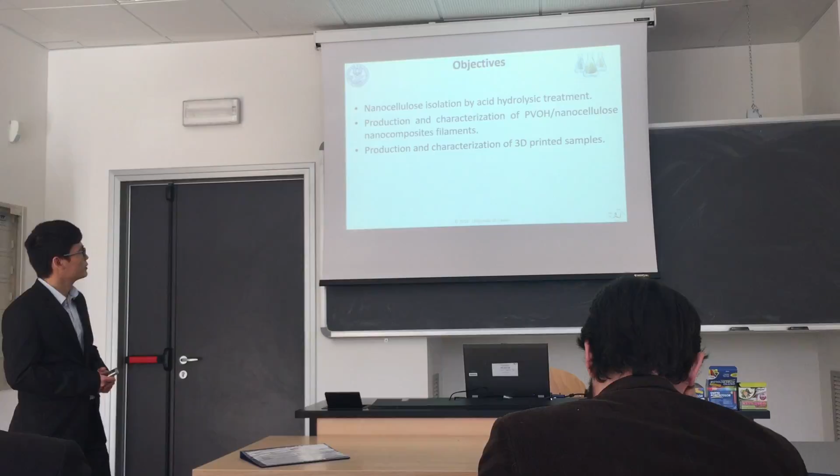My thesis will focus on three main parts. The first part related to the production and isolation of nanocellulose by acid hydrolysis treatment. The second part is the production and characterization of the PVOH/nanocellulose nanocomposite filament. And the final part related to the production and characterization of the 3D printed sample.

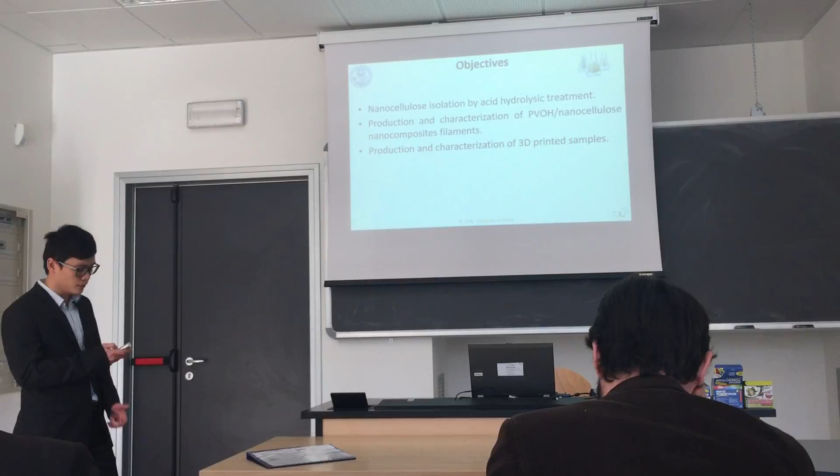Let's move to the second part, the experiment part.

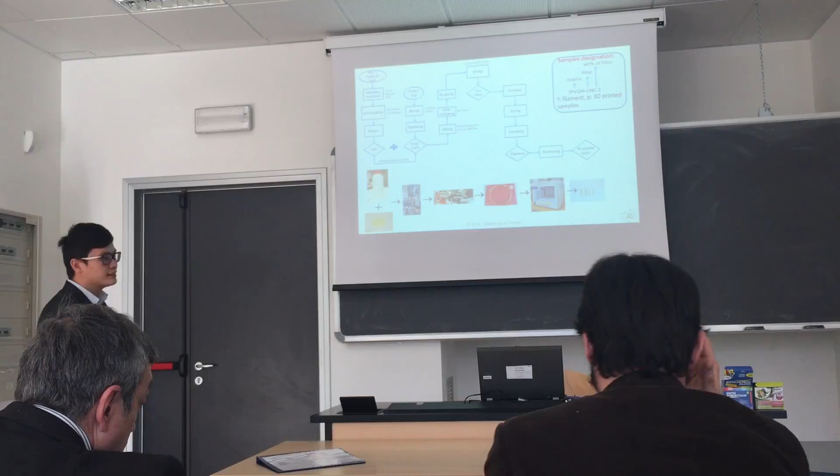Here is my nanocomposite production. From the left side is the production of nanocellulose. Nanocellulose CNC was synthesized by acid hydrolysis treatment for 1 or 2 hours. The synthesized CNCs were then mixed with the PVOH matrix with the help of ultrasonication. The mixture was then degassed and dried in the oven for a few days to obtain the film plates.

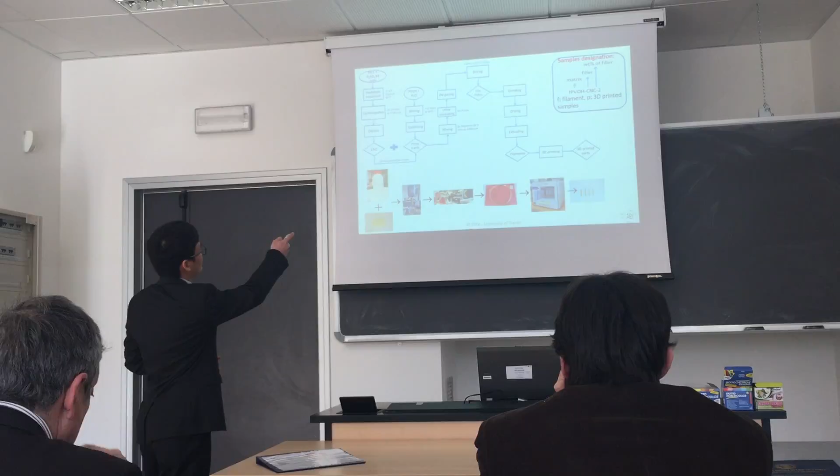Afterwards, the film plates were ground into powders before being extruded into filaments. Finally, the obtained filament can be applied in the 3D printing machine to obtain the 3D printed part.

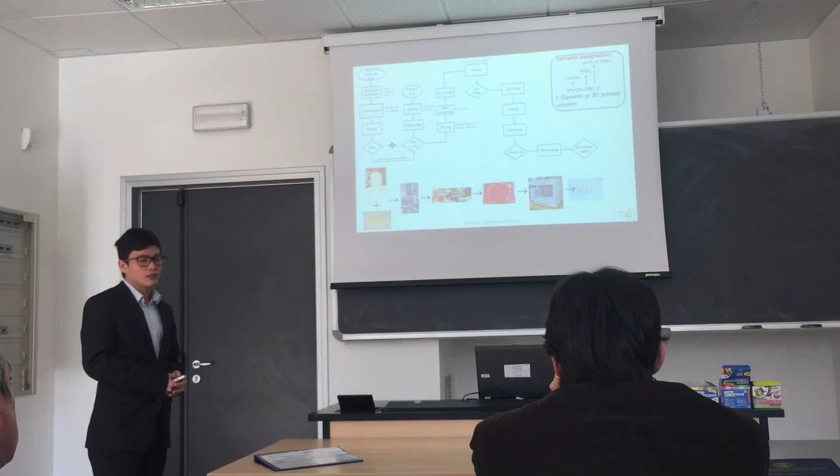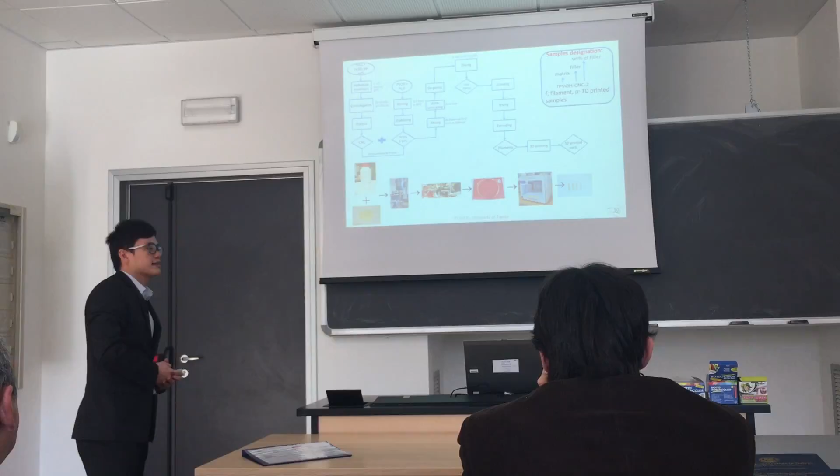To make it easy to understand during my presentation, this is the designation I use for my samples, on the top right. F is designated for filament, P is designated for 3D printed sample, and the value, for example 2, is designated for the percentage of nanofiller used in my nanocomposites.

Let's move to the result discussion part. First of all, I will give you some results about the morphologies and characterization of the synthesized CNC.

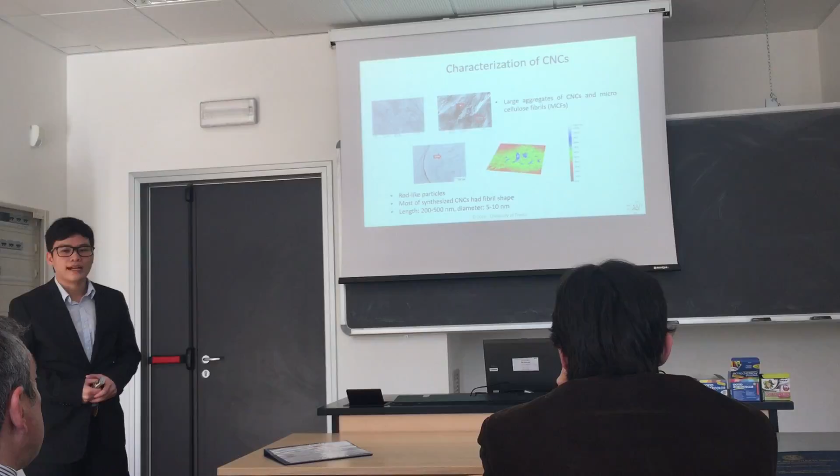The SEM and TEM techniques were used to evaluate the morphologies of CNC. As can be seen from the SEM image with different magnification, we can clearly observe the large aggregate of the nanocellulose and microcellulose fibrils.

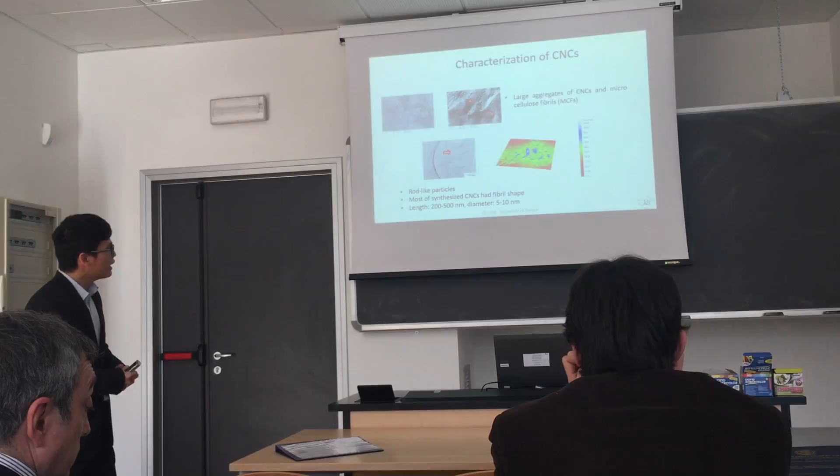Additionally, the TEM image revealed the synthesized CNC with a rod-like shape. Furthermore, the AFM technique also helped us evaluate the synthesized CNC, which has a fibrous shape with length varying between 200 to 500 nanometers and diameter varying between 5 to 10 nanometers.

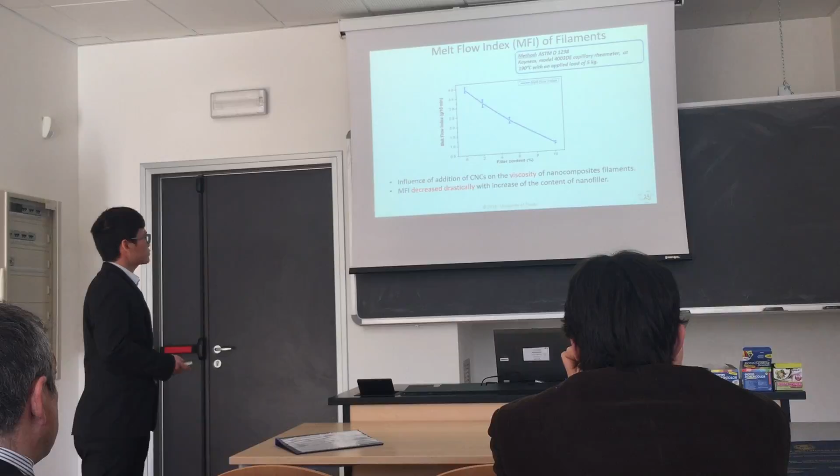Let's move to the melt flow index test, MFI, of the filaments. This test helps us assess the influence of the nanofillers on the viscosity of the nanocomposite filaments. We can see clearly from the graph that the melt flow index decreased significantly with increase in content of the nanofillers.

In these figures, I cannot obtain the value of the composition with 20% of nanofillers because this composition is too viscous. This is one of the reasons I cannot use this composition for the 3D printing application.

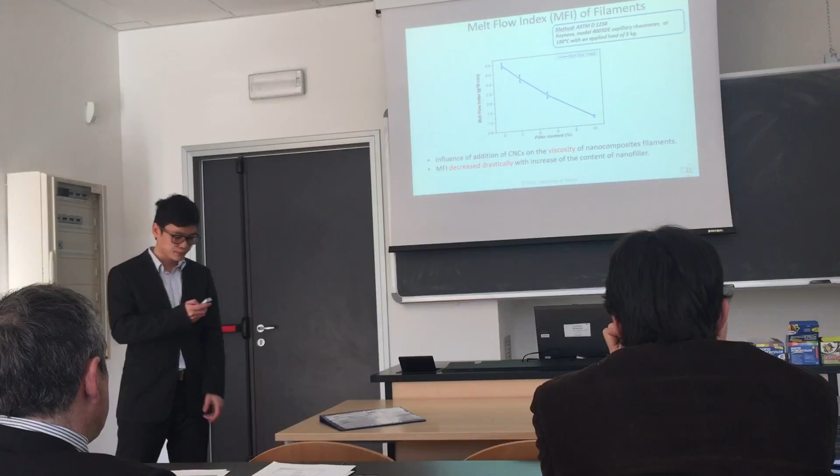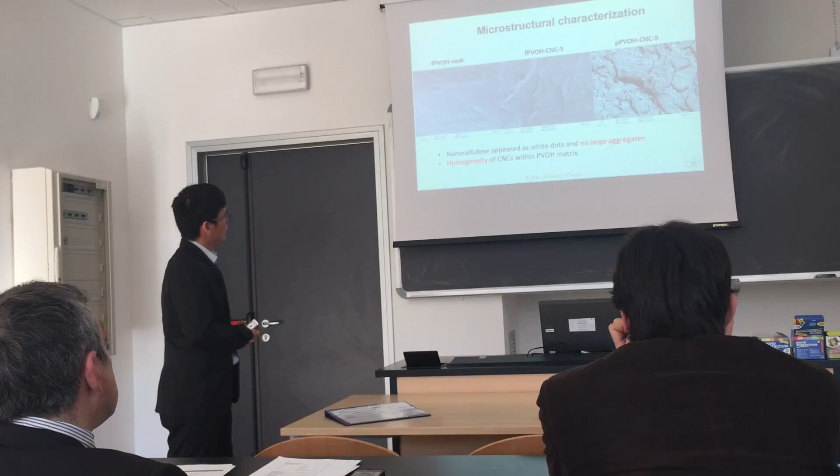We can clearly see that in the pure neat filament, the surface is very smooth, whereas the surface in the composite is a little bit rough due to the presence of nanocellulose. Nanocellulose appears as a white dot, and there were no large aggregates. This observation revealed the homogeneity of the nanocellulose within the PVOH matrix.

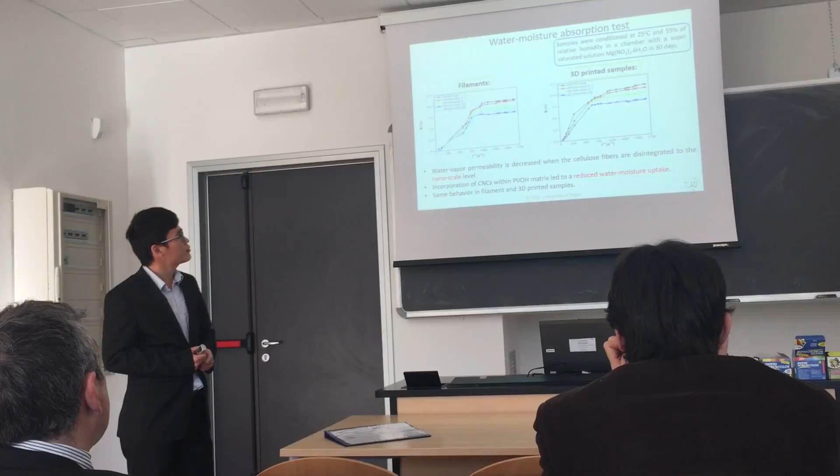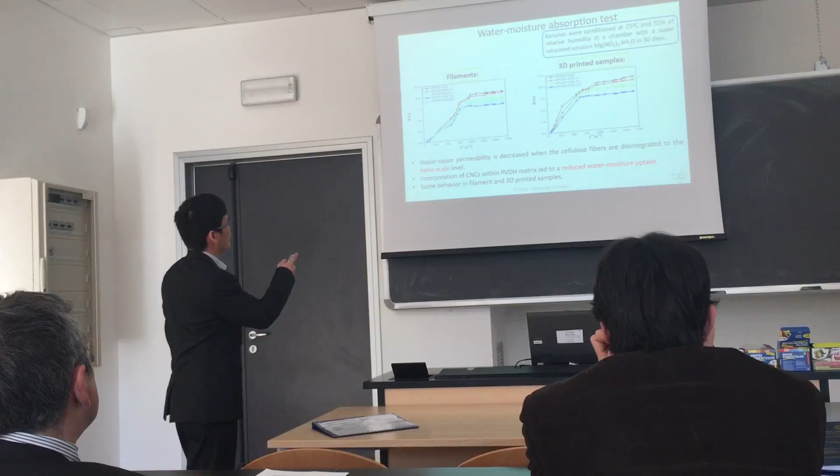Coming to this slide with the water moisture absorption test. This test helps us determine the time to reach the saturation condition. As we can see from the figure, when we increase the content of nanocellulose within the PVOH matrix, the water vapor permeability decreases.

It's very interesting because cellulose is hydrophilic, however when we disintegrate them down to the nanoscale, they behave as a water vapor resistant agent. So this result proves the excellent water vapor resistance of nanocellulose even in a hydrophilic matrix like PVOH.

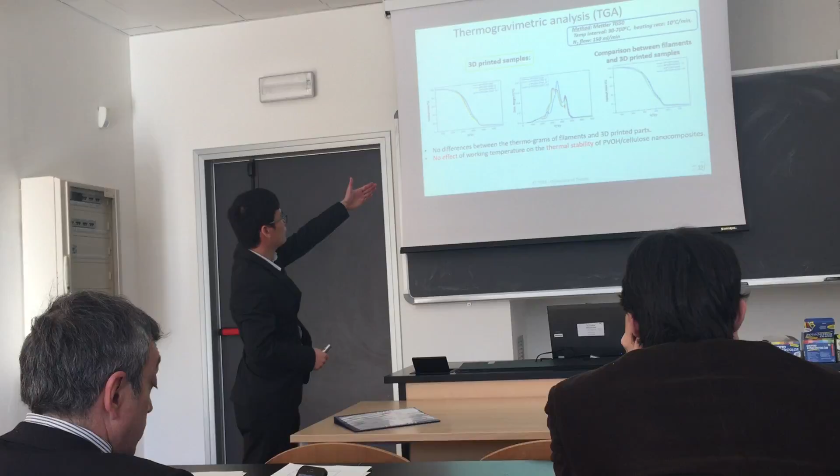This is also the TGA thermogram of the 3D printed sample. We can also clearly see the increase of the thermal behavior by the increase of the maximum degradation temperatures, as seen from the derivative weight thermogram.

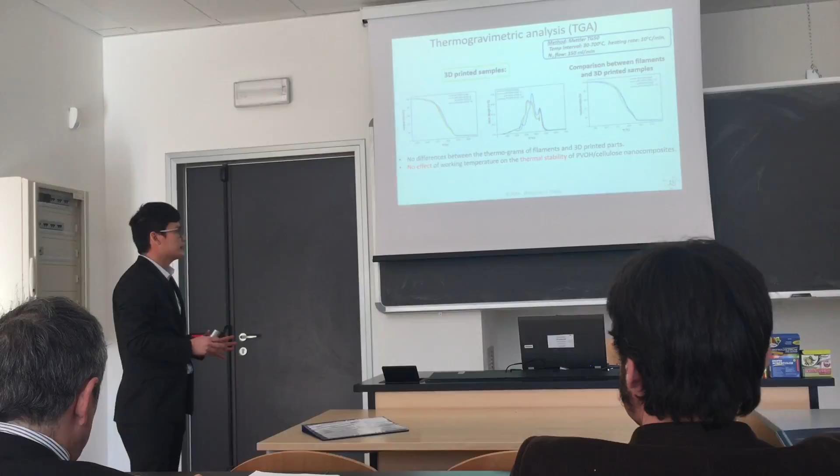Taking into account the comparison between the filament and the 3D printed samples, on the right side there were no differences between them, so we can conclude that there were no effects of the working temperature on the thermal stability of the nanocomposites.

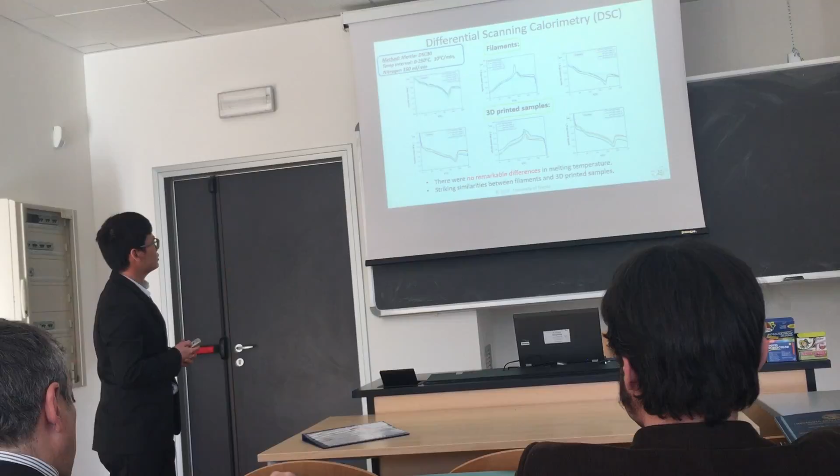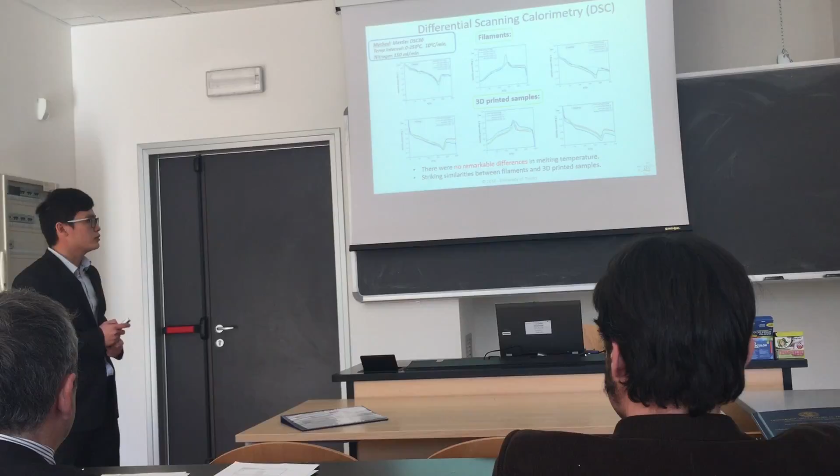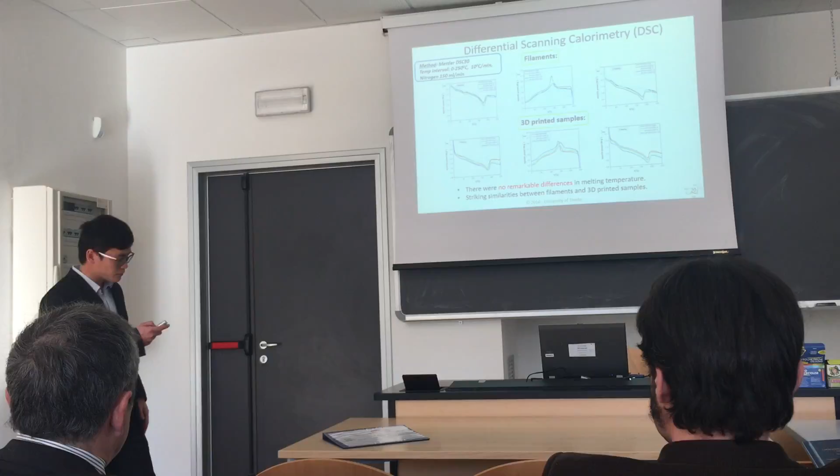For the DSC thermogram, we can see from the figures that in the comparison between the filament and the 3D printed sample, there were no remarkable difference between melting temperature. So this is a good point for the workability of the nanocomposites. And there were also striking similarity between the filament and the 3D printed sample.

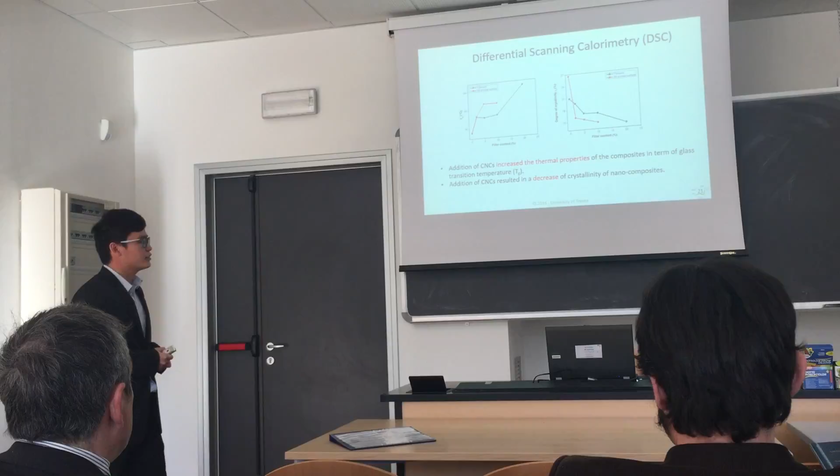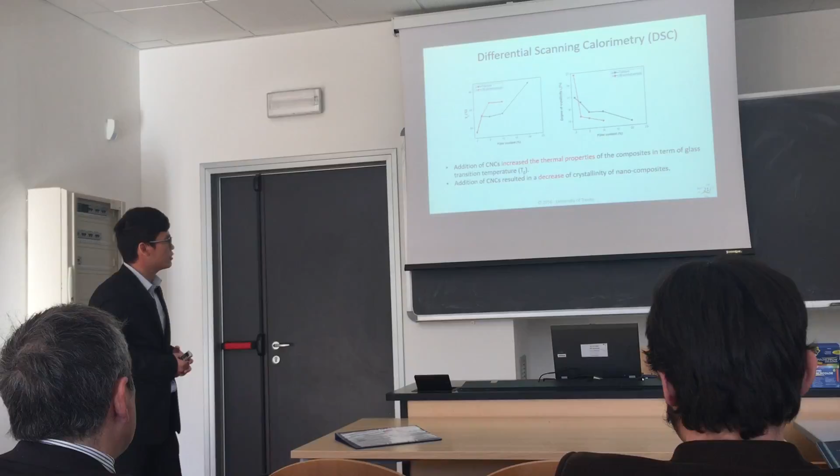From the DSC results, we have some conclusions. With the addition of the nanocellulose, it increased the thermal property in terms of the glass transition temperature, as we can see on the left figures. Another striking feature is that with the introduction of the nanocellulose, it tends to decrease the degree of crystallinity inside the nanocomposites.

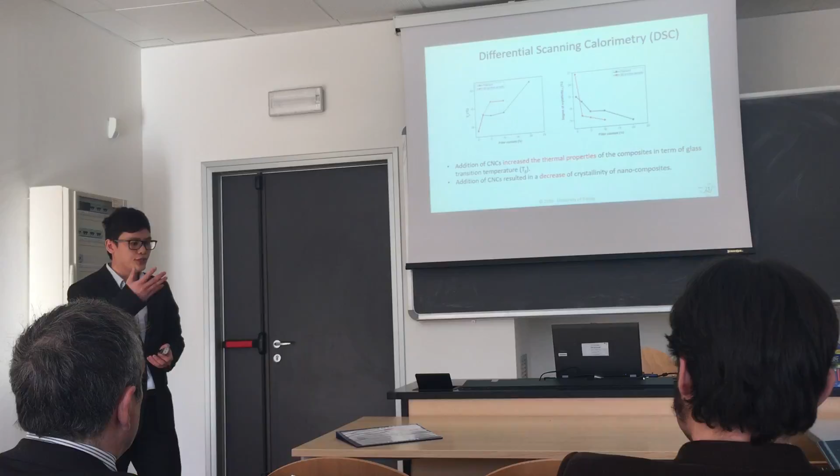This behavior can be explained by the fact that when we introduce the nanocellulose, it tends to impede the polymer mobility change, so it leads to a decrease of the nanocomposite crystallinity.

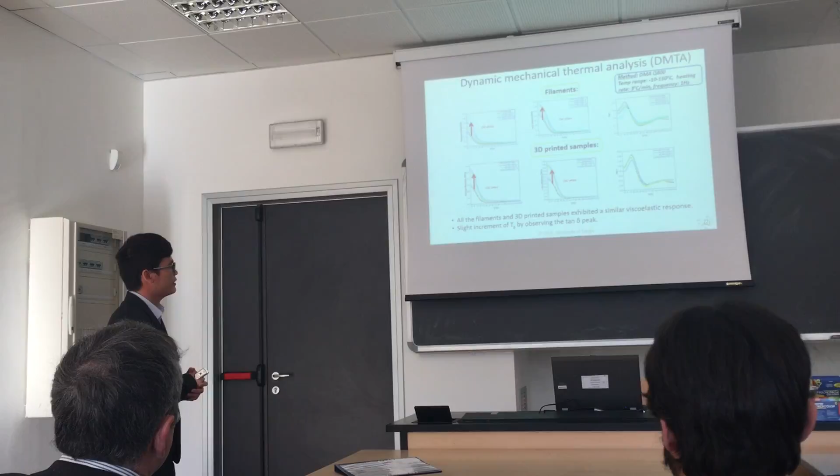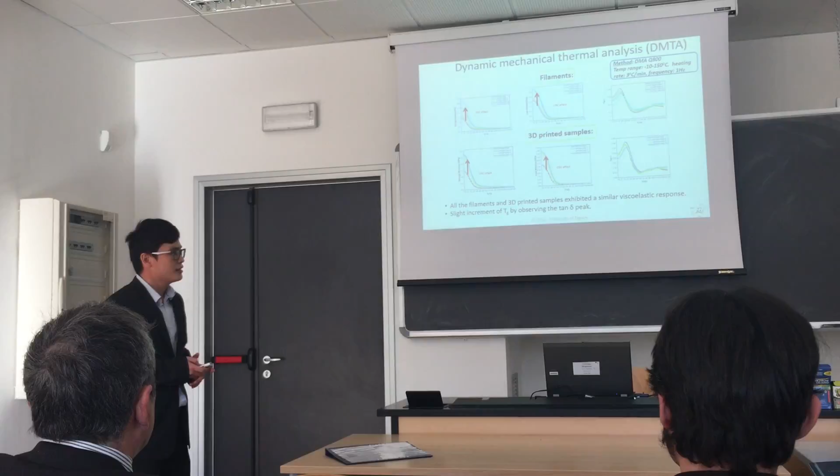During crystallization, here is the comparison of the dynamic mechanical thermal analysis (DMTA) of the filament and the 3D printed samples. We can clearly see that all the samples display similar viscoelasticity behaviors, and there was a remarkable enhancement of the storage modulus, the loss modulus, and slight increments of the Tg, observed by the peak of the tangent on the right side.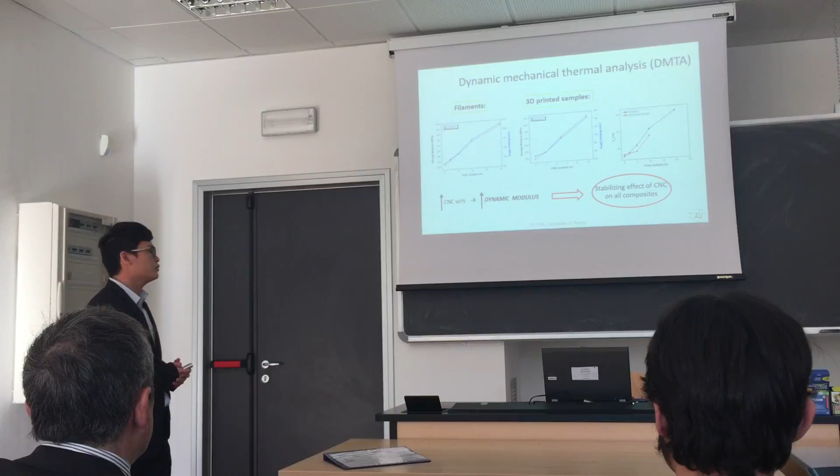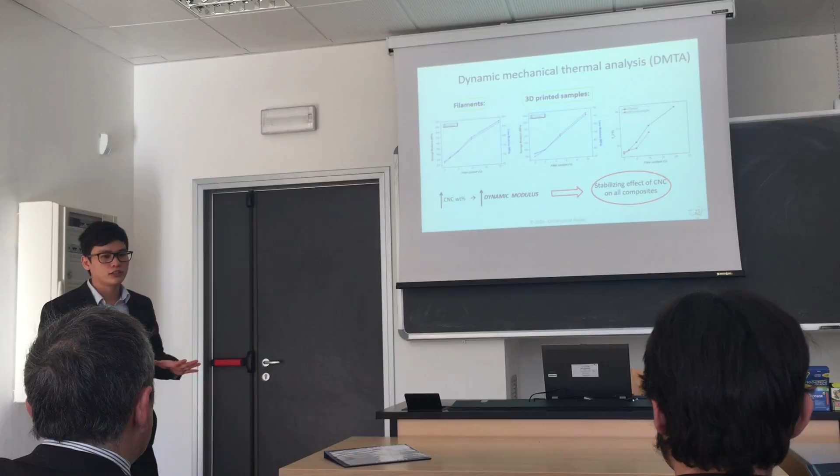So the introduction of the CNC leads to an increase of the dynamic modulus, and these results prove the stabilizing effects of nanocellulose on all the composite samples, regardless of the processing methods.

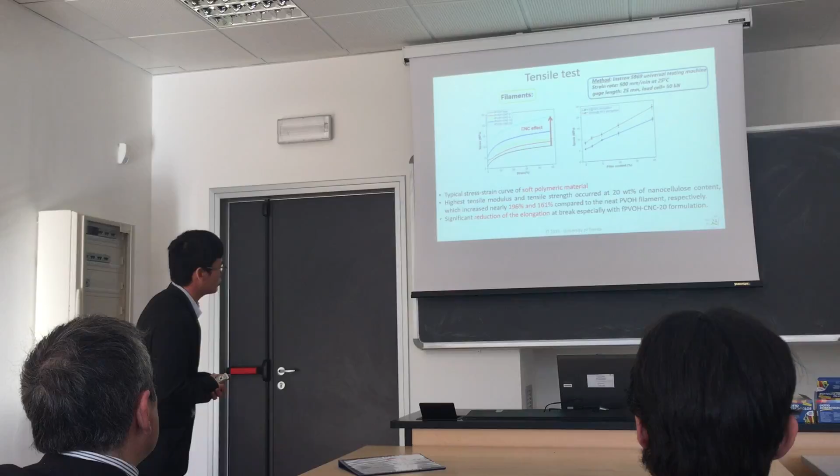For the tensile test, in the case of the filament, we obtained representative stress and strain curves of the nanocomposites. Their behavior is typical of soft polymeric materials. When we add more nanocellulose, the tensile property increases, especially with 20% nanocellulose inside the matrix. However, this phenomenon is accompanied by a reduction of the elongation at break.

And the same behavior we can obtain for the 3D printed samples. We can follow the figure in the slide.

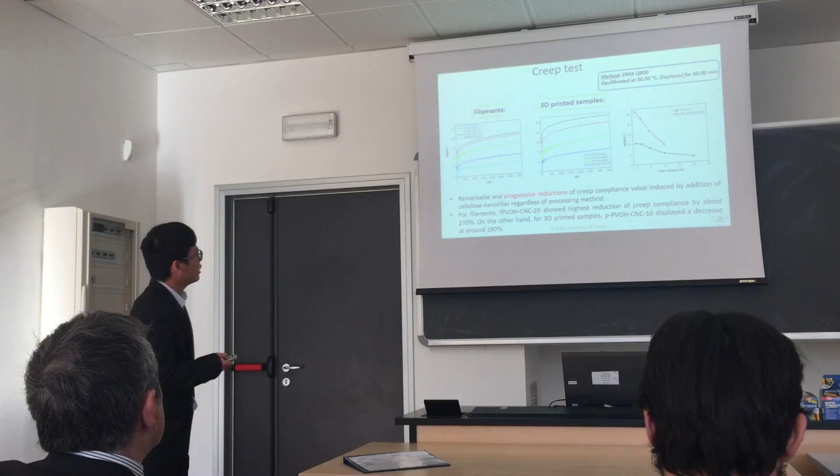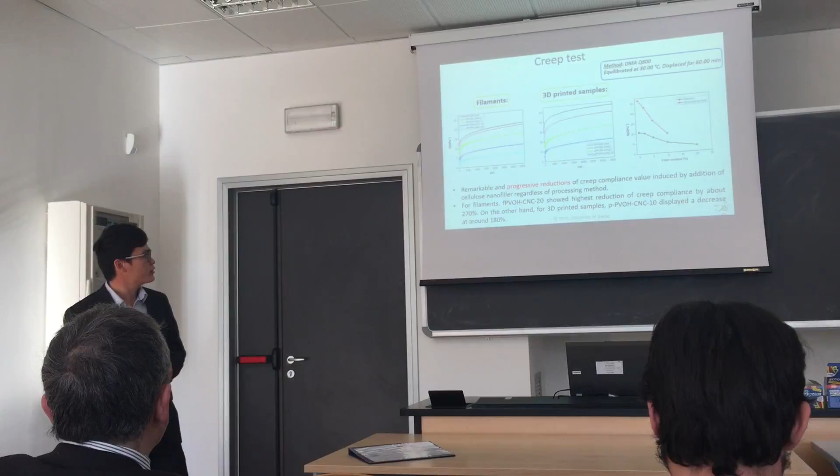For the creep test, this test helps us determine the dimensional stability of the nanocomposites. Following the curves of the creep test, there was a remarkable and progressive reduction of the creep compliance when we introduced the nanocellulose within the PVOH matrix.

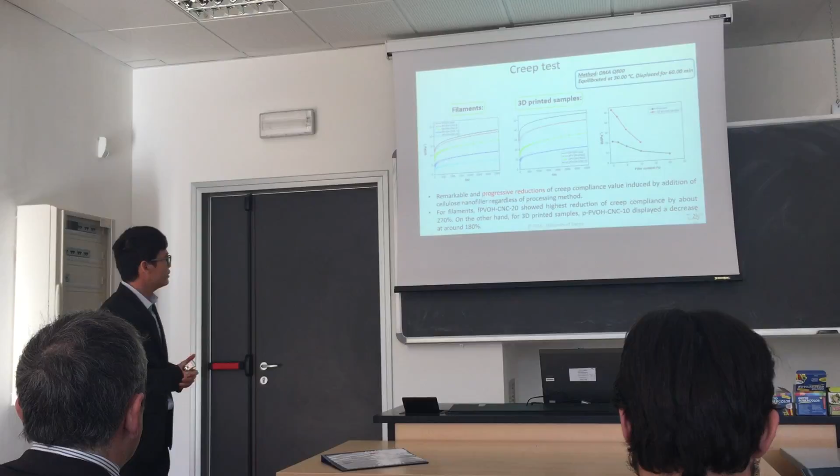For example, for filaments, the composition with 20% showed a high reduction, by about 270% compared to the neat one.

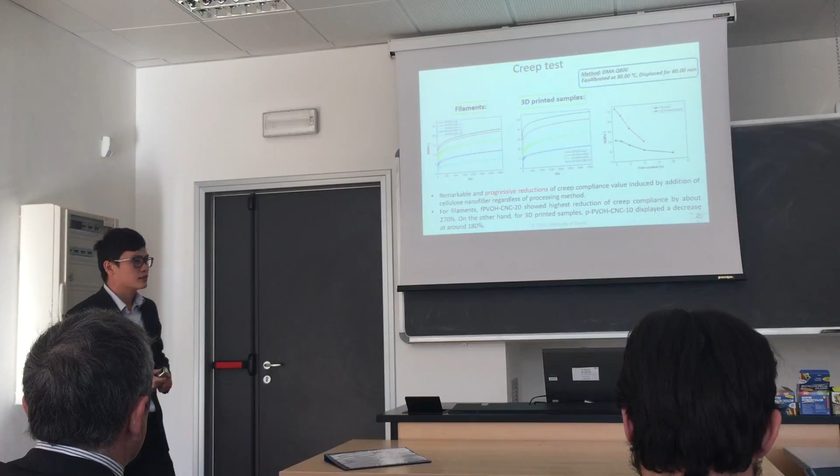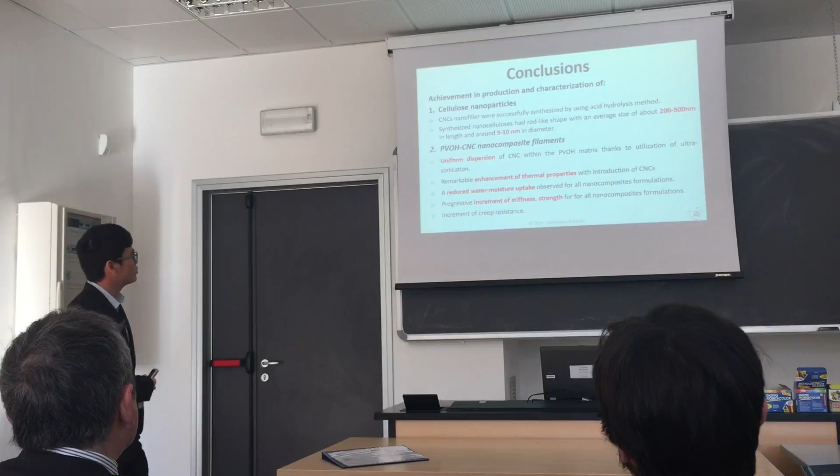So let's come to the final part, the conclusion. My thesis successfully achieved three main parts. The first part related to the production and isolation of nanocellulose, my own nanomaterial that I already synthesized.

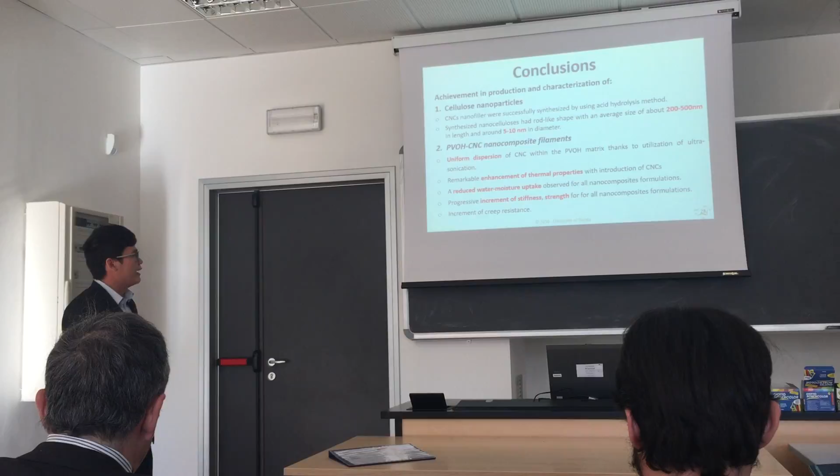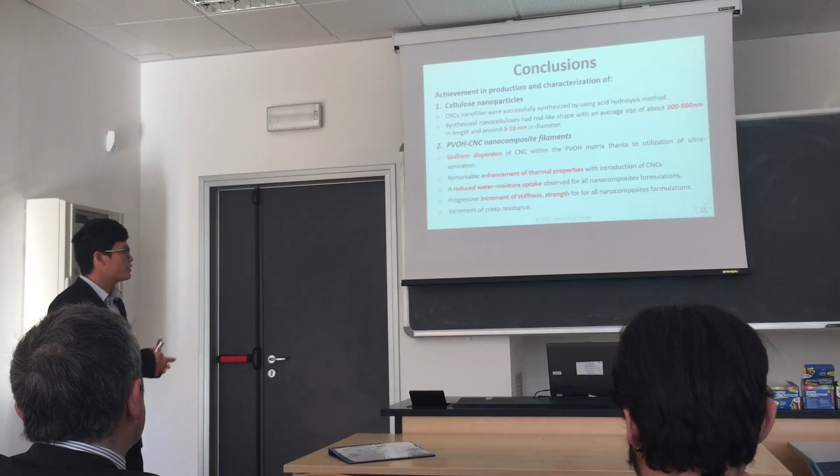They have a rod-like shape, with an average length between 200 and 500 nanometers and a diameter around 5 to 10 nanometers. We also succeeded in producing the nanocomposite filaments through the application of ultrasonication, and the introduction of the nanocellulose showed good properties in terms of water vapor resistance and increased stiffness, strength, and also creep resistance.

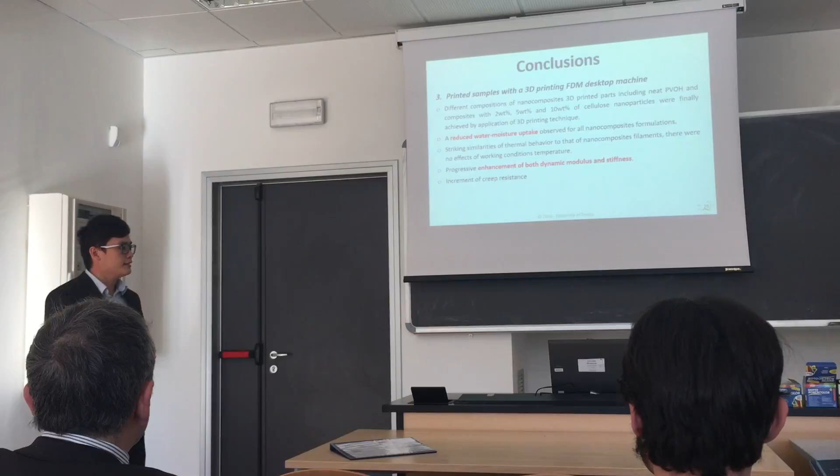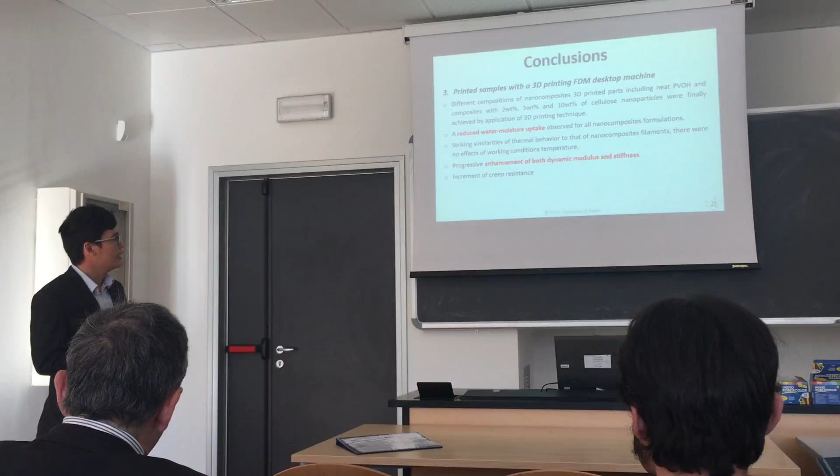For 3D printing, we also succeeded in using this type of material for 3D printing machines with different compositions from 2 to 10% nanocellulose, and we obtained excellent properties of the nanocellulose within the PVOH matrix for the 3D printed samples.

A part of my thesis was presented at the International Conference on Nanomechanics and Nanocomposites in Vicenza last September.